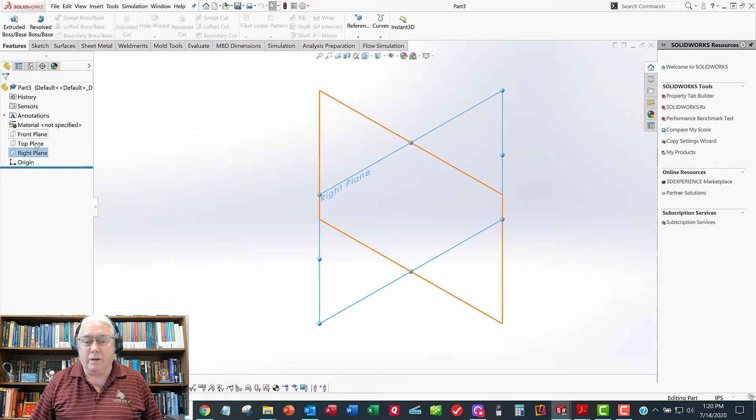As before, we'll start with a new part model. We're doing inches, so we'll use our typical part model template. I'm going to think about this part revolving around the right plane. That makes sense, going this way, so that seemed like a good choice.

So I'm going to sketch and make my sketch to be revolved. What happened?

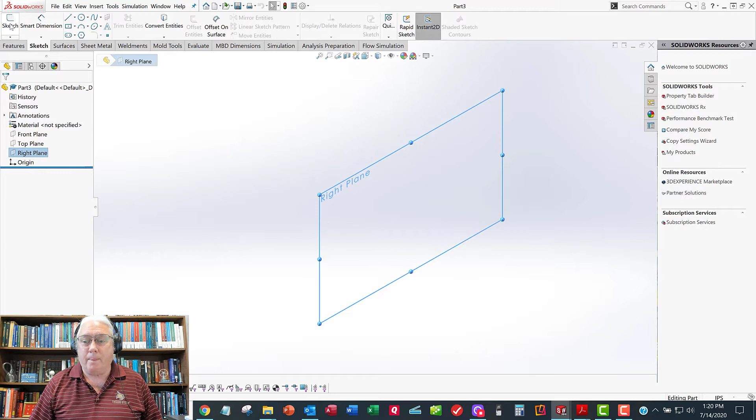Now we're rocking. Alright, so my center line is going to be a horizontal line here going through the origin. And so, wait for it.

Need my boss to buy me a new computer. I forgot, I am the boss. Alright, buy a new computer, Summers.

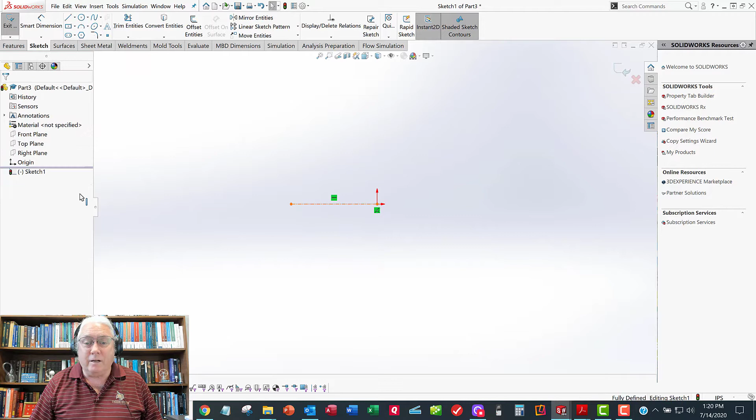Alright, here we go. Here's the center line. I want it to go through the origin. As usual, I want to make it infinitely long, because that's the way I roll. It needs to tie to the origin. Alright, now maybe I'm ready.

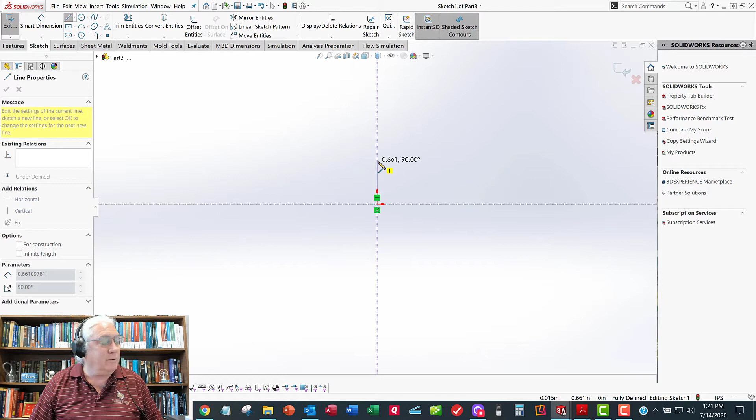So we're going to draw half of it. I can't put a hole in the middle because that hole is going to be rectangular, so I want to close this thing out. This is the front face, and I want the front face to be on the front plane. So this goes up like this, and this goes down a little further. And that doesn't look too horrible.

Alright, so now I've got a bunch of verticals and horizontals. I think I'm ready for some dimensions. And I don't dimension to the edge, I dimension to the center line so I can get all these in diameters. So that diameter looks like to be a 1/2 inch.

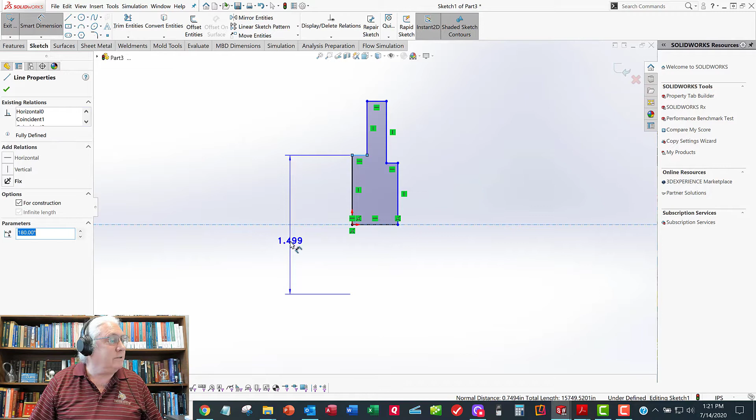This diameter looks to be 0.469. Seems to be a weird number, but it is what it is. And then this is 1 1/8.

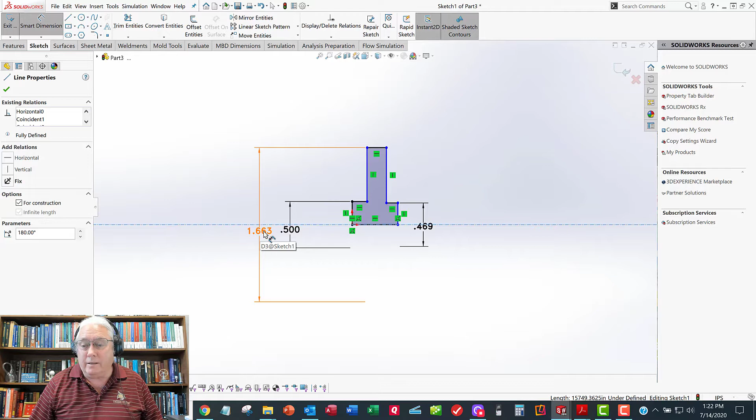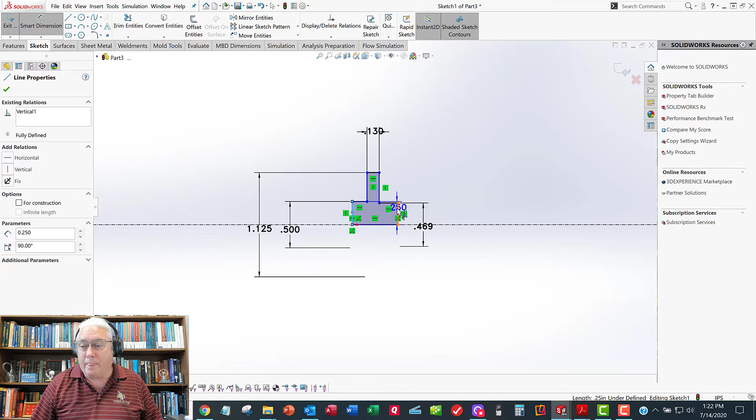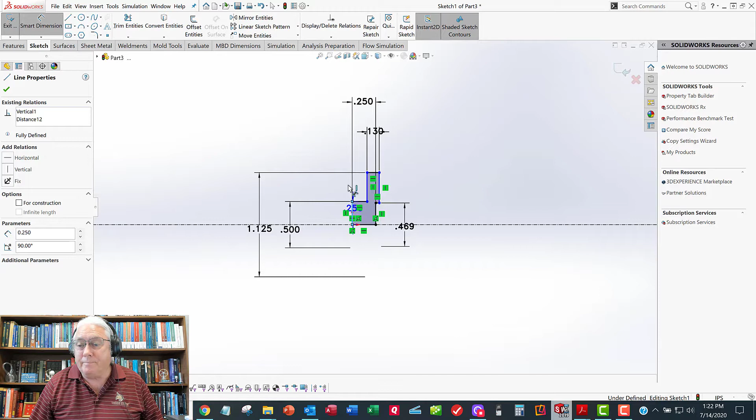Alright, looks like I'm fully defined. Why does it say underdefined? Where's my blue? I don't see any blue. I think it's lying to me. Let me get out of the sketch. Sure enough, it rebuilt itself, so it's actually constrained. Sometimes Solidworks needs a little shove there.

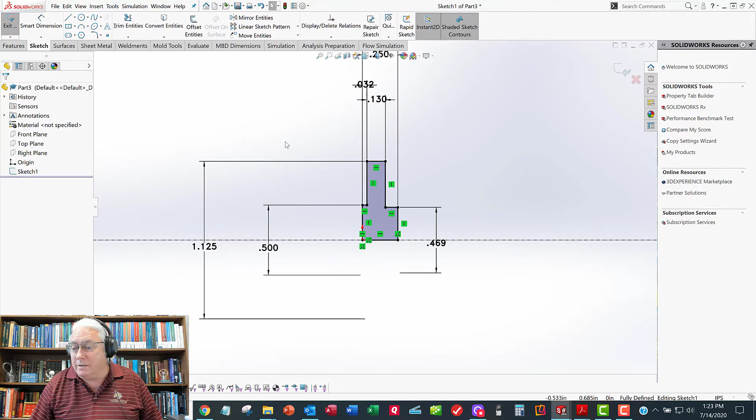Alright, so I got my sketch, let's revolve this bad boy. Select the sketch, features, revolve boss base. I've only got one axis, and it assumes I want 360 degrees, which seemed like a good idea.

So now I'm good. Now let's do the cutout. Sketch on this face. Make me a center point rectangle. Maybe.

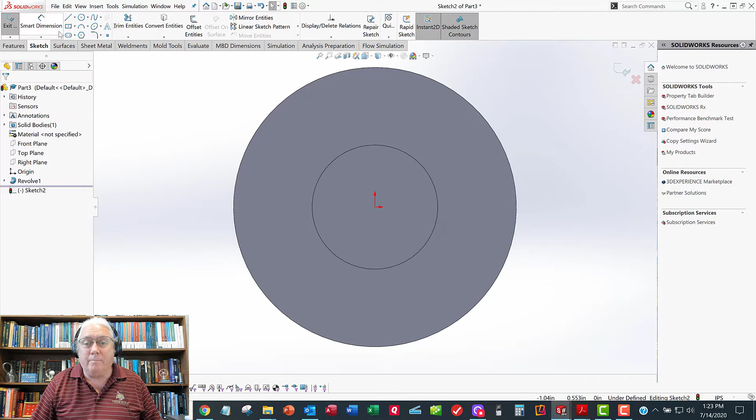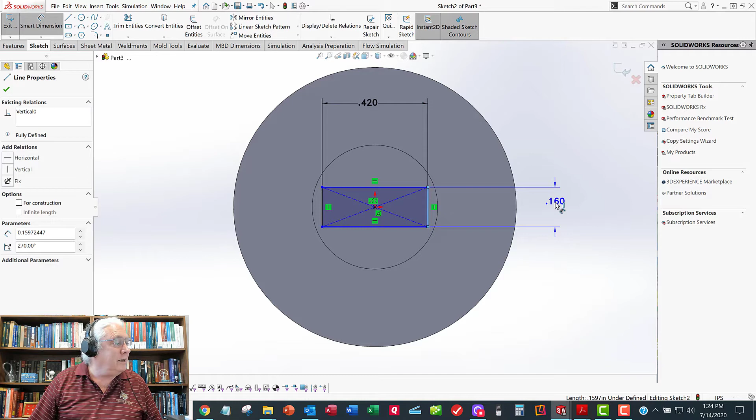Alright, there's my cutout. Need 2 dimensions. For WR32, that looks like a C, which would be 42. And this guy here is a D, which is 1/4 of an inch.

Yeah, that wasn't too painful. Why is this thing hitting here almost? Because I chose the wrong number. Let's get out of here.

If you'll notice on the callouts on the drawing, there's a different diameter for those two outer diameters. I call it OD1 and OD2. And so I need to fix that.

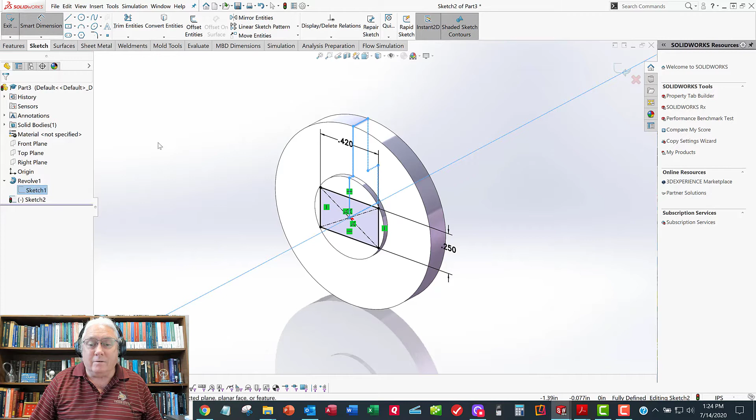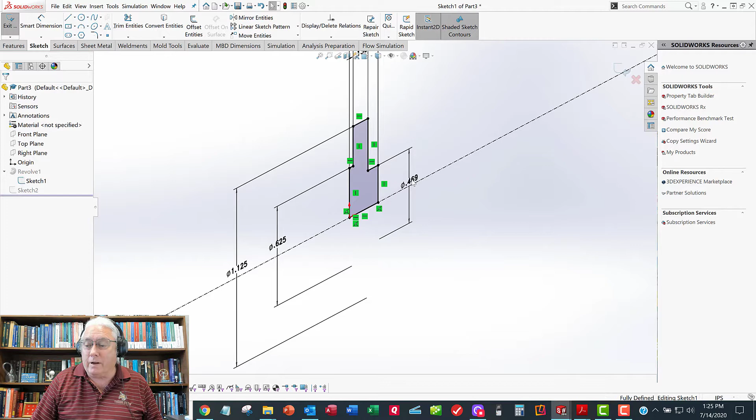So you'll have to pay attention closer than I did when you make your sketch 1. This is 625 in my case, and this one's 469. I call these OD1 and OD2. We'll turn these parametric on, going from a good to a great model to make it so we can build all of these things. But for the first go around, just make your part match whatever one you've been assigned.

Alright, so when I do that, get out of that sketch. Now my other sketch looks more reasonable. I need to do an extrude cut, and need to go all the way through the part. That's my design intent.

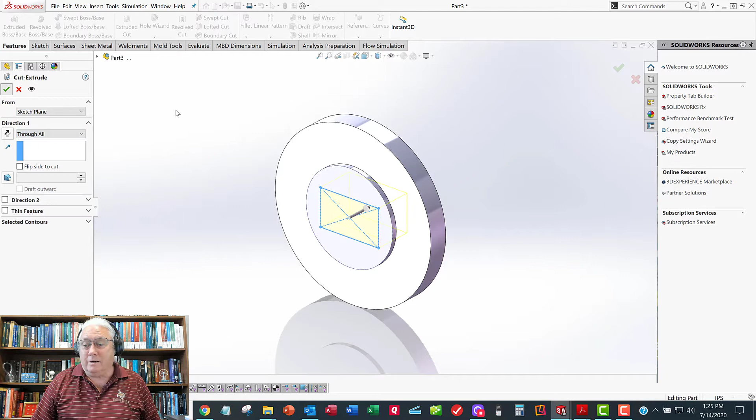So now I'm going with that. Now I'll make my hole pattern. I'll start with these counterbore tapped holes.

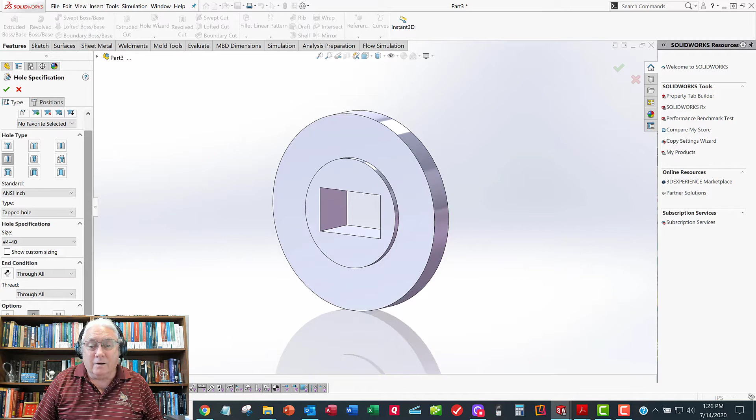I want to start with a hole wizard. These are 4-40 tapped holes, so I'll choose such. I want these to go through all. I want to use cosmetic thread, thread callout, thread class. All that looks good. Now I want to go to positions.

I want to select the face, and I'm going to click 1, 2, 3, 4. Unfortunately, it won't let us do tapped counterbore holes, so we're going to have to do the tapped holes first and then add the counterbores.

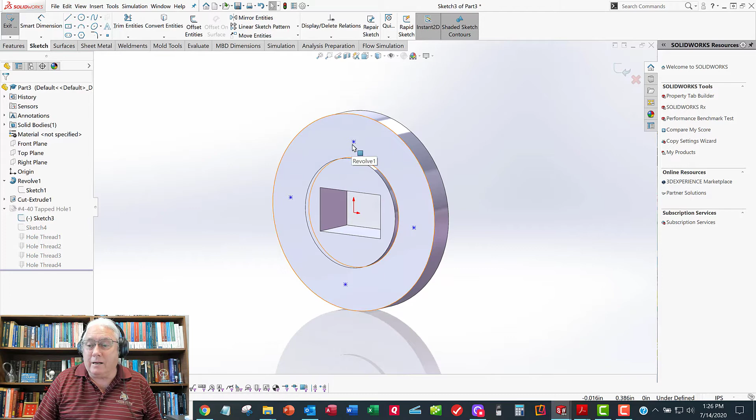Since I just randomly clicked on the screen, I got to go in the sketch and tie down the locations. So I'll line those up vertically. Seems like a good idea. Line these up horizontally.

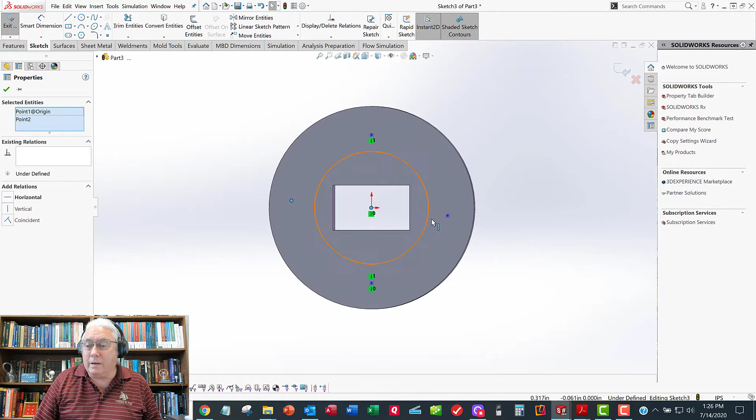Missed that, didn't I? Get rid of that. Go back and get that point. Line those up horizontally. Now I might want to use construction geometry to control these guys.

So if I select that and make that construction geometry, and I can click this, control click this and make it coincident, but I'm lazy today, so I think I'll just drag it over there.

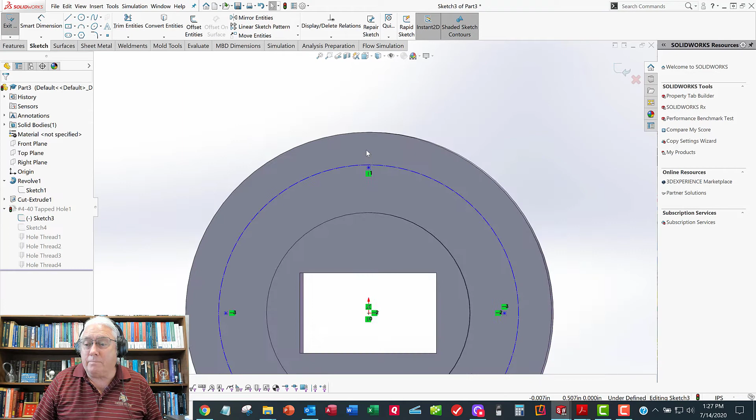So if I drag that point to the circle, I'm patient enough and wait for the thing to catch up. I can drag this point to the circle and get my coincident constraint. That seems like a pretty quick way to do it.

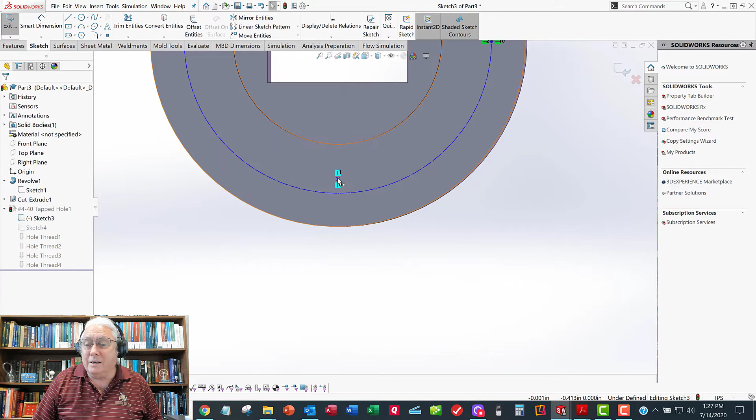So if all of these points live on the circle and they're all lined up vertically and horizontally with one another, then all I need to do now is put a dimension for this DBC. DBC is diameter bolt circle.

So if I dimension this construction circle and make it 0.9375, now I should have a fully constrained sketch, which I do, and then my holes are actually located where I want them. Now it's time for the counterbores.

I'm going to go make a sketch on the same face. I'm going to draw 4 circles, and I'm not going to dimension to these circles. I'm going to locate them to the existing circular features.

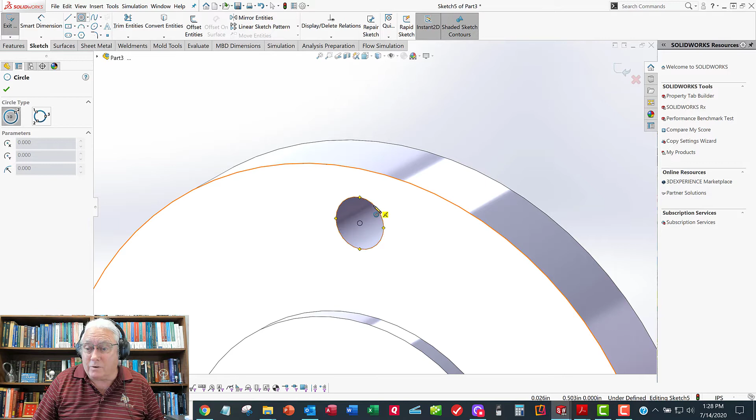So I'm going to hover over that circle, go grab the black dot. Now that circle has already got that built-in constraint to be coincident with the other edge. Don't click, just hover, get the black dot, go get it, place your circle. Hover over, get the black dot, make your circle one more time.

Piece of cake. That one's not a piece of cake because I missed it. Let's try it again. 3 out of 4 is not bad. It's not perfect. There we go.

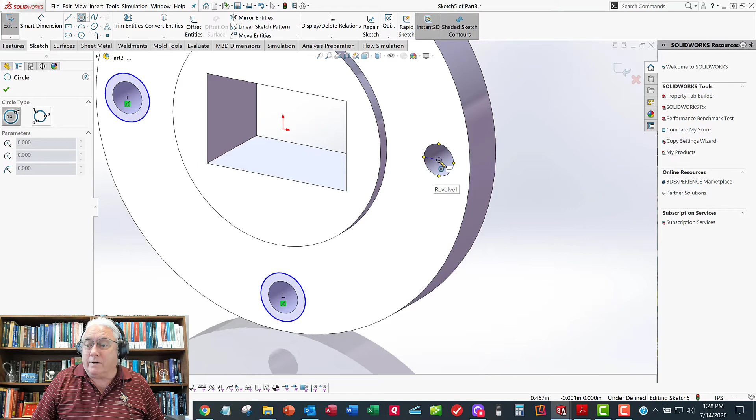Now all of them are sitting at the coincident. Now I can select these and make these all equal because I don't want to put 4 dimensions on here. That would be silly and a waste of time.

Now I just need one more dimension, and should have a fully constrained sketch.

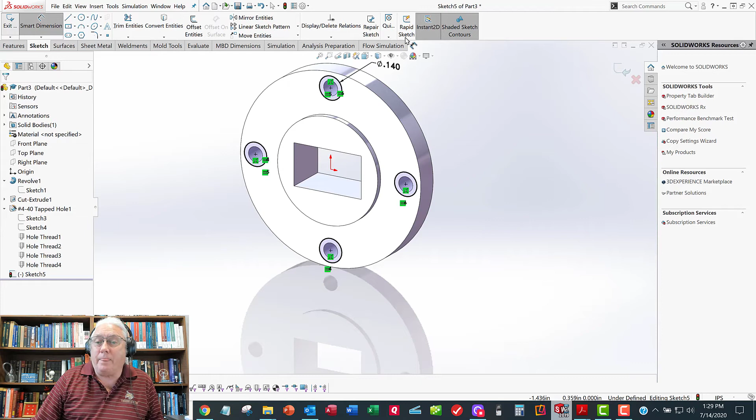Get out of the sketch. Select the sketch. It's playing that trick on me again. It says minus there, but it should be fully constrained. See what it says when it gets out. There it goes. Fully constrained.

Pre-select the sketch. Features. Extruded cut. And I want to go... how deep do I want to go? I forget how much it is. Whatever the drawing says.

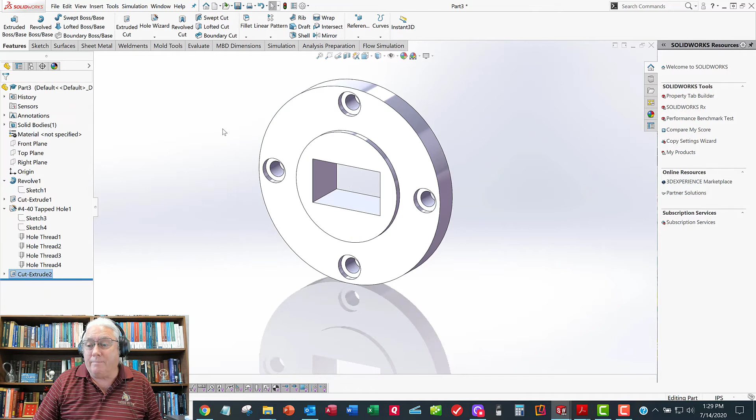Alright. It's a beautiful thing. Why am I not seeing my tapped holes? Well, because I got to change these silly settings. I come down here and turn on annotations. There they are. Cosmetic threads look beautiful.

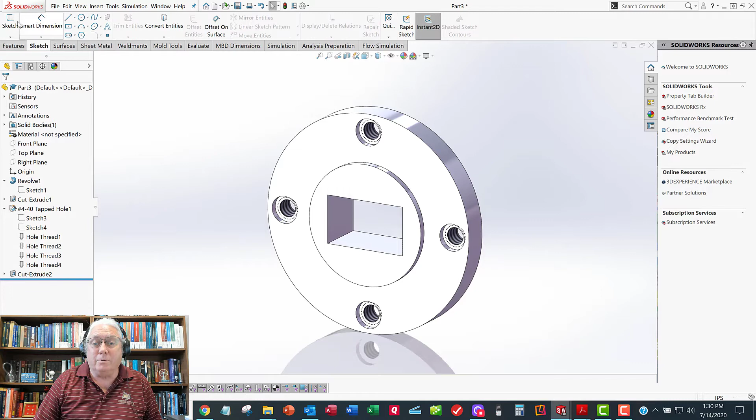Alright, so add your material. Oh, we're not through yet. We got to add these pin holes and clearance holes. So, spoke too soon. So let's add those guys.

Again, I want to do a diameter bolt circle. Help control these things. Make me a construction circle. And I need two different size holes. I need a hole here and a hole here. And a different size hole here and here.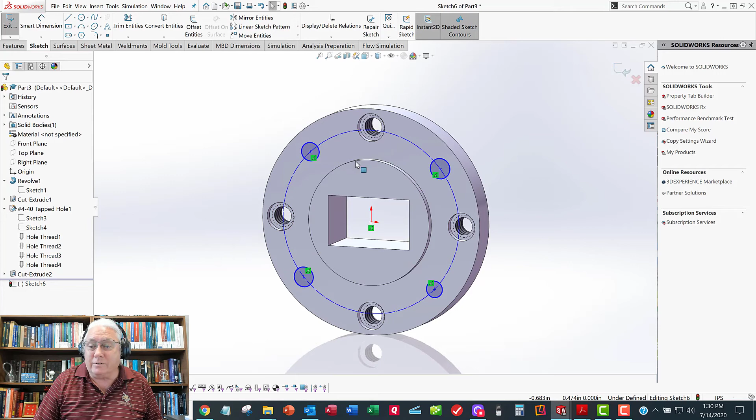And how am I going to locate these things? Well, I don't have two dimensions, X and Y. I've got a diameter bolt circle. I got some angles. So I don't want to have to do any trig, sines and cosines to figure out the X and Y distances. So let's do something more reasonable. Let's define the bolt circle, diameter bolt circle.

Let's do some more construction geometry. I love construction geometry. So there's a line, and I'll connect this guy to this guy.

Right click select, should have said end chain. Another one from here to here. Right click end chain will keep you in the line command, select will get you out of the line command.

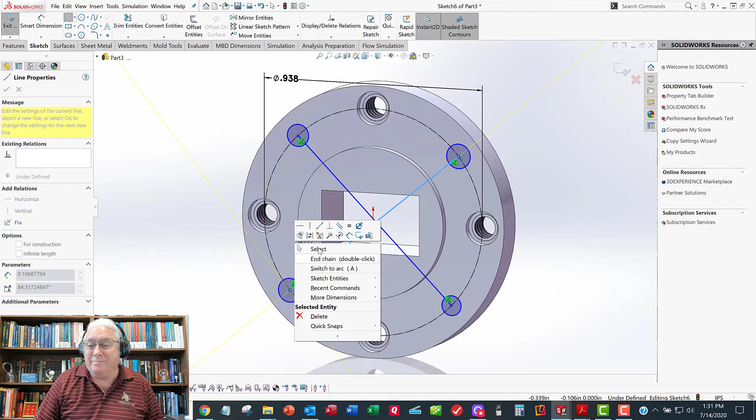I'm going to turn these into construction geometry because they're not part of my extrude shape, they're just part of what I'm using to control the geometry with. I want to select this line, control click this line, get them both at the same time to be construction. And if these are diagonals, I've got to have these go through this origin.

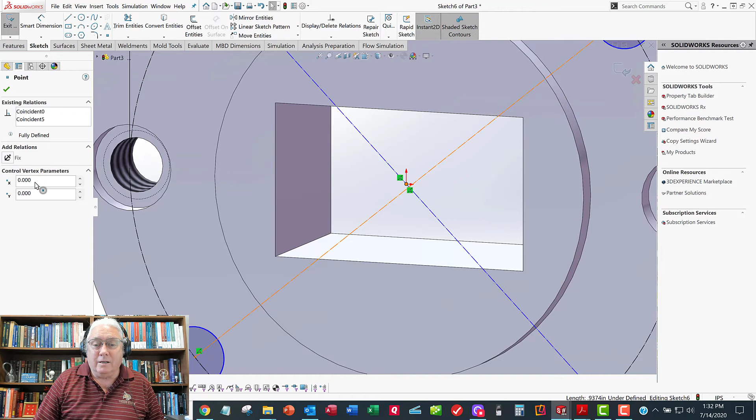So I want to select that line, control click the origin, coincident. This one also needs to be coincident. Now those lines are all going through the center of the part, so I know their diameters.

Now all I need to do is add a 45-degree dimension. These are all controlled like I like them, same with the other ones. So I want to make these two lines.

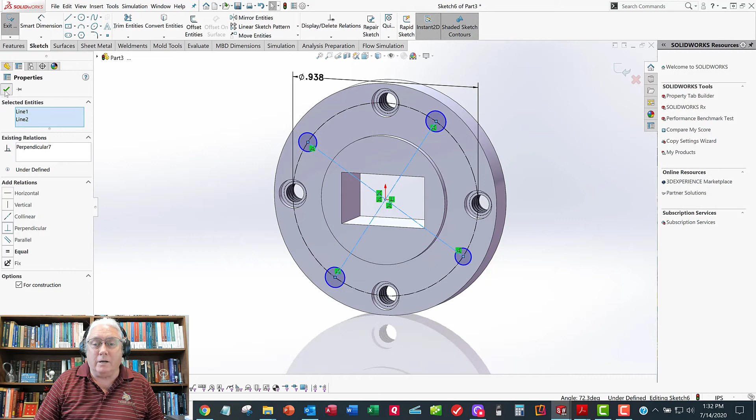I could do a 45 and a 90, but I like construction geometry. Let's make those perpendicular to one another. And then all I need is - what the heck happened? How do I dock that back where I want it to go?

That's kind of a pain. Somebody get extra points if you can tell me how to get that docked again.

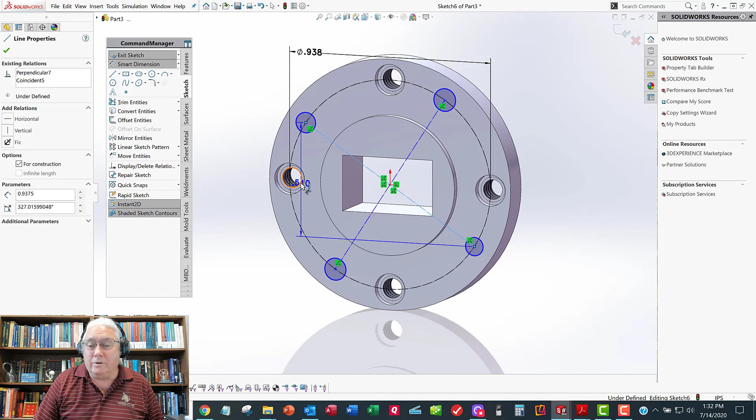So now I want to go to dimension, if I could just find the button. From here to what? There's nothing, there's no horizontal line to dimension to. Well, there is - don't forget about your planes. And so I can dimension from that line to the plane and make that 45 degrees.

So now that sketch is constrained except for the size of the holes. So this guy here needs to be one size.

Hope I get these right - check the drawing, this may or may not be right. This one's going to be the other size, whatever that number is.

Alright, what's happened to my sketch? It looks like it's underdefined. It says, why is it underdefined? Haven't made these equal yet? Is that my problem?

This guy and this guy need to be equal. Don't leave me, Maverick.

That circle and that circle need to be equal. This circle needs to be equal. That's got to be it, right?

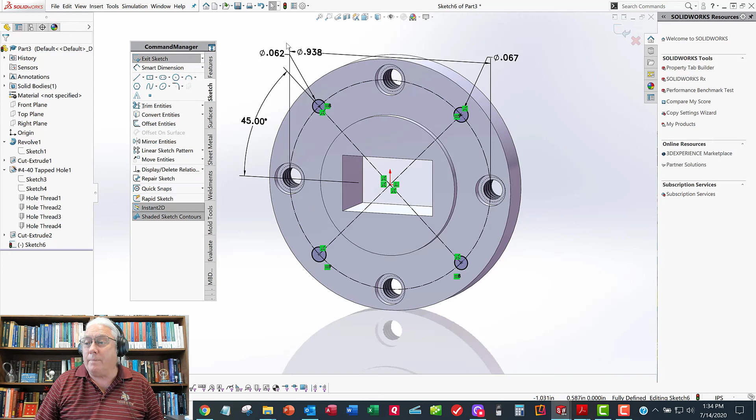What's left? Fully defined, just the way I like it. Get out of the sketch.

And pre-select the sketch. How in the hell am I going to get back to the command line that I want? Features, extrude cut, through all.

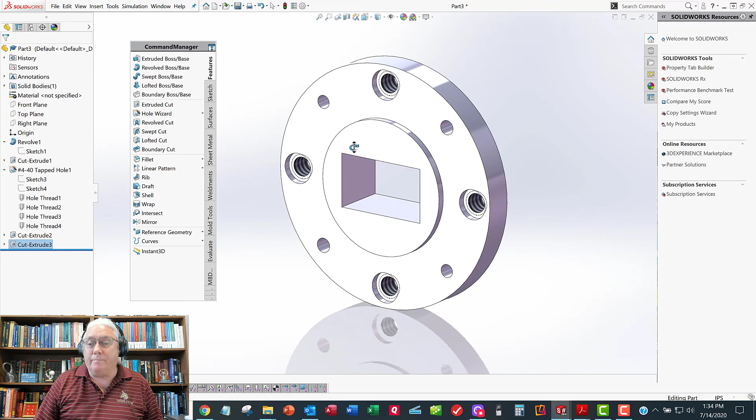Alright, now I think I'm done. So don't forget to add your material.

You go make the part, the little pin part will be next. I'm not even going to show you how to do it, it's too simple.

MS16555, go find the pin. It's the correct size, it's 1/16 inch diameter, 5/16 inch long, made out of stainless steel. Go find the right standard.

Call it MS16555-XXX, whatever the part number is. Use that as a file name. So when we do our drawing, all those file names will populate as part numbers in the BOM.

So that looks like it for now. Now we'll move on and turn these good models - well, first thing we'll do is make an assembly model.

And then we'll turn the part models from good models to great models. And then after that, we'll turn the assembly model from a good model to a great model. And then we'll spend about 5 minutes making a drawing.

All we're going to do is push a button to say make the views, another button to show the dimensions, another button to put in the BOM, and another button to do the balloon. So 4 buttons, we'll get the whole drawing, we'll do that. That'll be step 1, 2, 3, 4, 5 or so.